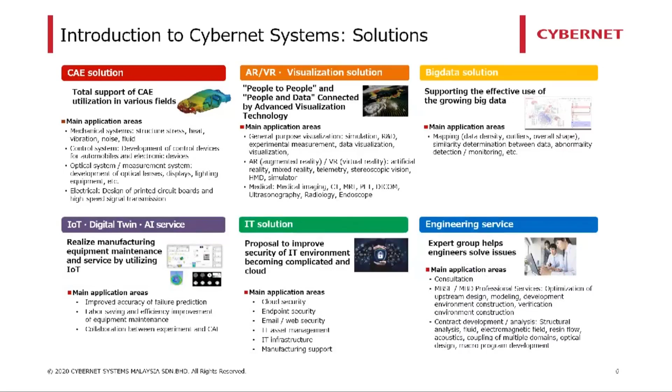As I said before, ANSYS provides multi-physics simulation for every type of need. Those simulations include mechanical solutions, thermal fluid solutions, electronic solutions, design solutions, which are mainly for designers, and some additional options which include a parallel computing module, material data selection, analysis tools, and so on.

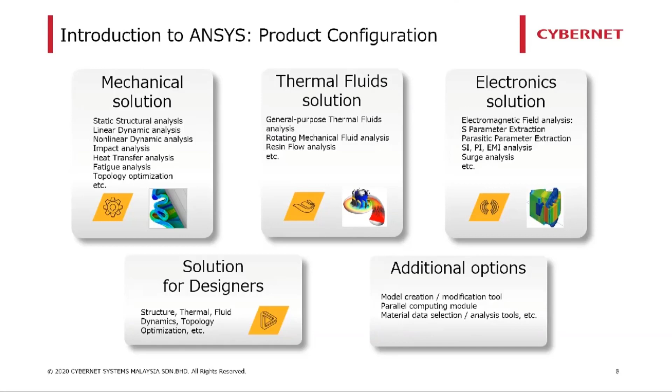So now we get into MultiScale.Sim. What is MultiScale.Sim exactly? The reason why I explained about ANSYS in the previous slide is because MultiScale.Sim is an add-in tool for the ANSYS Workbench environment. Developed by Cybernet Systems Japan, MultiScale.Sim can perform a numerical material test on composites to estimate macroscopic anisotropic material constants without having to carry out actual physical material testing. The way MultiScale.Sim performs this numerical test is by using homogenization analysis for multiscale modeling. In essence, the principle behind MultiScale.Sim is based on the method of multiple scales, used to derive averaged equations of a much larger scale from consideration of the small scale.

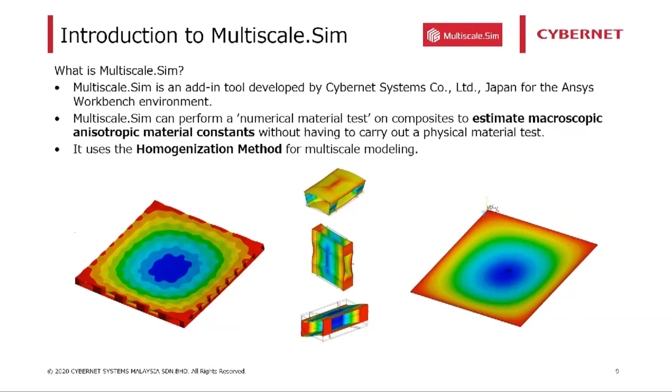Now, before we go deeper into MultiScale.Sim and its features, let's learn the motivation and background of this software first. First of all, what is a composite? Basically, a composite is made by physically combining two or more materials or components to produce a combination or blend of structural properties which is not present in any individual component. They can, for example, provide greater strength and rigidity than is found in any of the separate components while being as light as possible.

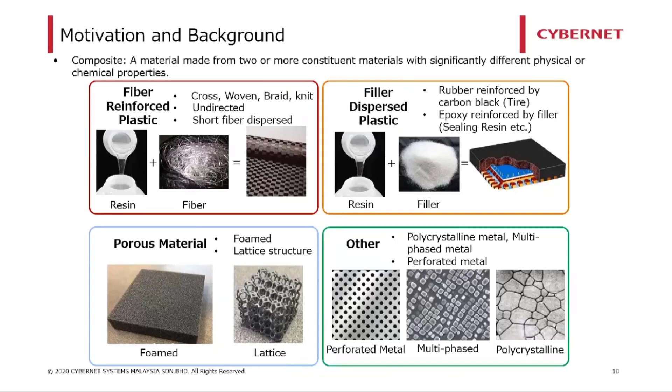So a survey conducted by NAFEMS's Composite Working Group showed that many FEA analysts often struggle the most when it comes to finding proper materials data for composite materials. Now, this matter is truly understandable as composite material is comprised of two or more materials, and the configuration of those materials may vary depending on the purpose. To find the material properties exactly like the users want can be challenging. Therefore, this is one of the motivations behind the Multiscale.Sim software, as I will explain later on. Multiscale can perform a numerical material test and accurately predict the material properties for almost any kind of composite.

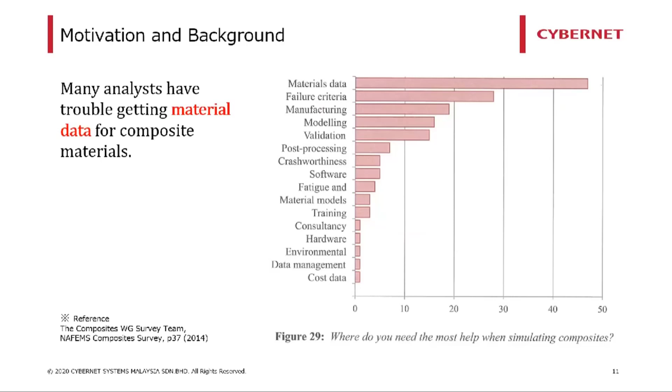Now, when it comes to finite element modeling, analysts usually stumble upon several difficulties. For example, a full structure of composite usually comprises a super thin layer of material or a very small hole relative to the whole model. Now, the scale of the microstructure to the whole model is huge, causing problems when it comes to the meshing process of the model. Plus, because the composite material possesses anisotropic material properties, fiber direction or distribution need to be taken into consideration as well, as it plays a large role in how the composite structure will behave under certain loading or boundary conditions.

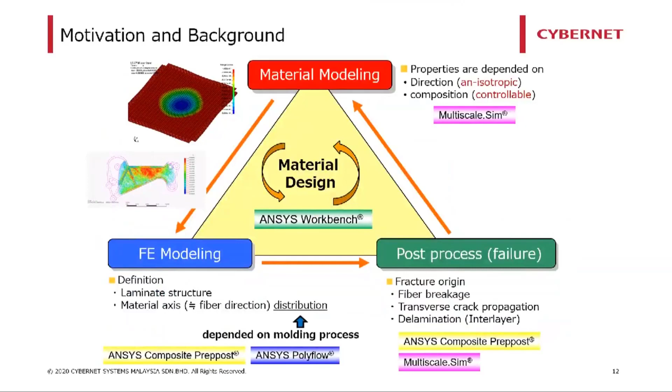And then, of course, when it comes to evaluating the result during post-processing, problems such as finding a failure model to base on for any particular composite material can be a problem as well. Again, it is because composite material behaves quite differently from a typical isotropic material. For example, predicting a fracture origin, such as a fiber breakage or delamination of a composite. Now, accurate prediction of structural characteristics is a challenging problem in FEA due to its orthotropic structural behavior. Therefore, Multiscale.Sim is aiming to tackle this type of difficulty, especially when it comes to modeling the material properties of the composites.

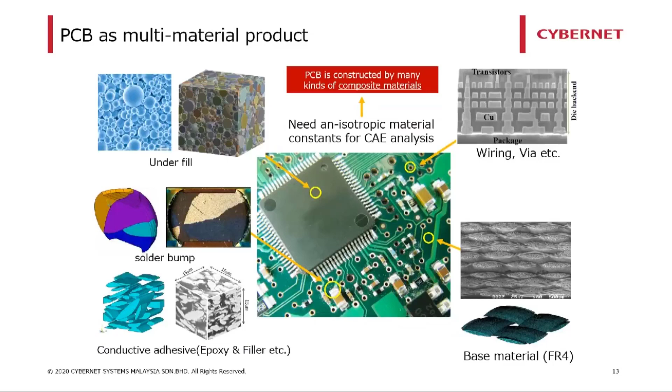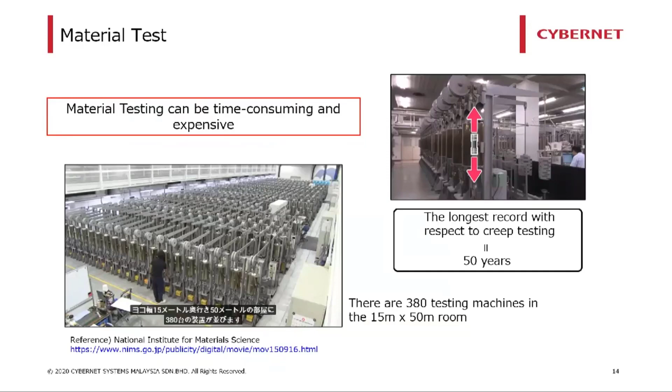So now let's dive into the features available in Multiscale.Sim. Now, what kind of function does it have to help in material design? Like I mentioned earlier, Multiscale.Sim can evaluate material property of composite material. It can be achieved by having the function of model creation, virtual material test, and also curve fitting.

Now, model creation allows the users to freely model the microstructure of the composite. The users can either model the microstructure themselves, or the users can simply use the Multiscale.Sim template available inside ANSYS DesignModeler and ANSYS SpaceClaim. Now, this template contains 17 different configurations of microstructure to choose from, including, for example, unidirectional fiber, crossweave, particle dispersion, and even honeycomb. The users can freely modify the dimension of the microstructure as well.

So now we have the main features of Multiscale.Sim. The virtual material test, also known as homogenization analysis. This is how the users can evaluate the material properties of the composite materials. It is done by performing a homogenization analysis on the microstructure that the users just define during the model creation process. Multiscale.Sim allows the users to be flexible when setting up the boundary condition as well.

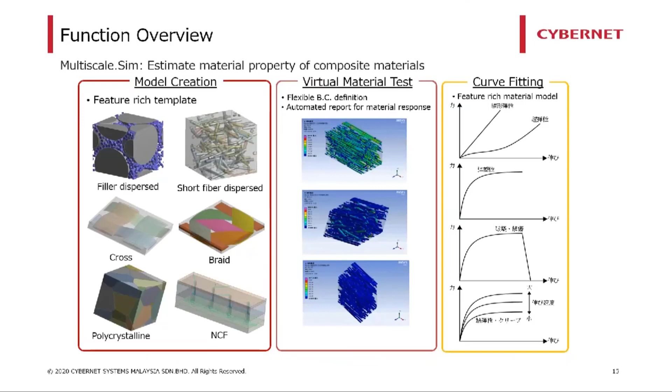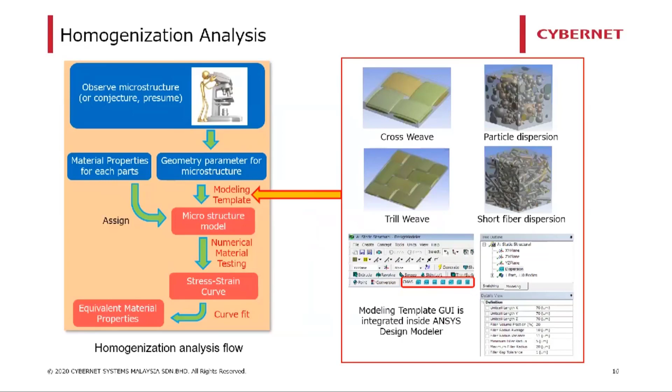As a result, the users can evaluate macroscopic material response as a stress strain curve, which is then used to evaluate the equivalent material properties via the function that I mentioned before, which is the curve fitting function. Now, the curve fitting analysis is performed in order to evaluate the material constants for any material constitutive law. All of these procedure settings can be performed in the ANSYS Mechanical GUI.

So therefore, the users are not required to learn any new operational procedures if they're already an ANSYS user. But if the users are new to ANSYS, the learning curve for ANSYS is not really that steep in my opinion. So the new users can understand how it works quite easily, especially with ANSYS Workbench. That is actually one of the major advantages of ANSYS.

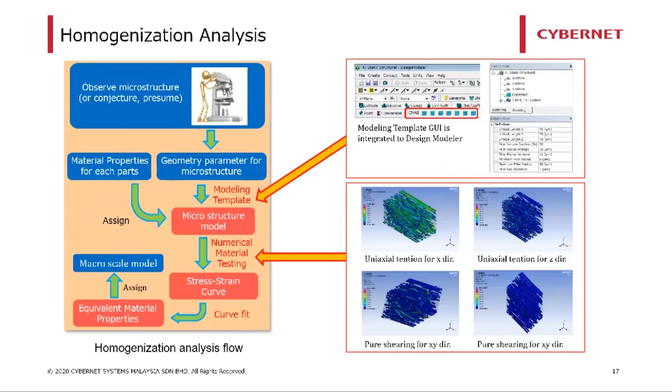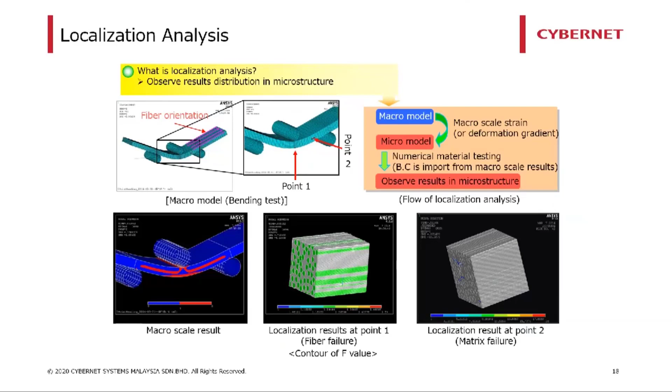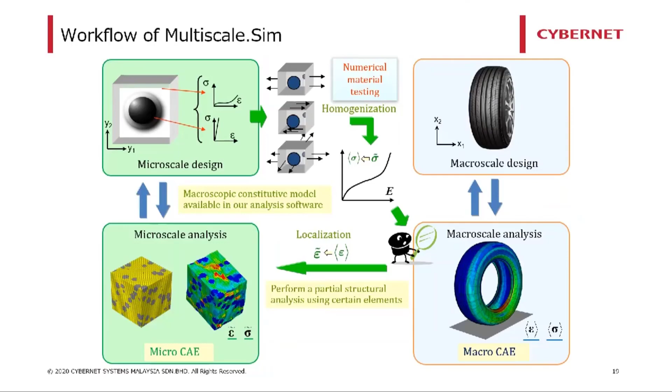So this is basically the summary of the typical workflow of Multiscale.Sim. We start with our microstructure design, followed by a material definition for each part of our composite. And then we perform the numerical material testing or homogenization analysis on the microstructure to evaluate the material properties of the composite material. Now, from here, we can either finalize our analysis with a macroscale analysis and final design, or we can continue with the localization analysis, say, for example, if the user is interested to study the microstructure behavior from our macroscale model. This final part is really up to the users.

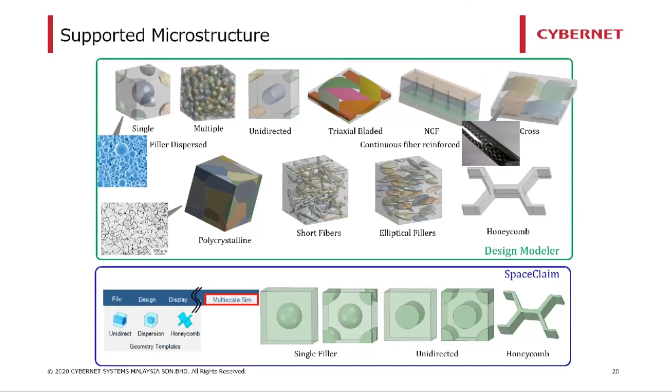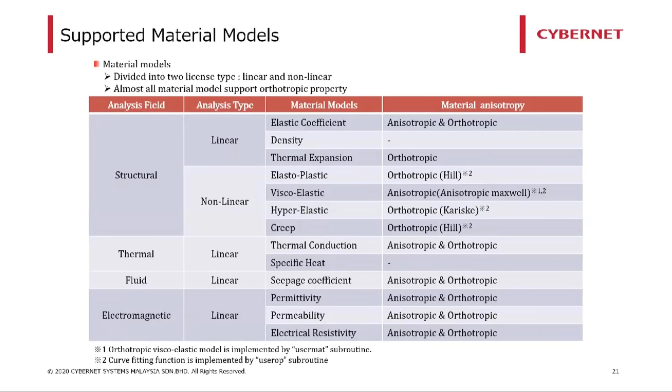So here on the slide right now are the supported material models in Multiscale.Sim. There are two types of license: the first one is a linear license and the other one is a non-linear license. The linear license allows the user to access only the linear analysis, while the non-linear license gives access to every feature of Multiscale.Sim. With structural analysis, users can have access to many different material models, as you can see on the screen. Models such as elastoplastic and also creep can be done with Multiscale.Sim. If you look at the table, almost all material models support orthotropic material properties.

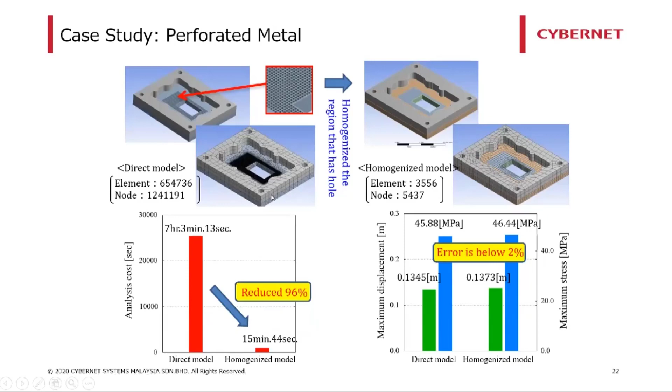For the homogenization analysis, the goal is to determine the homogenized material properties. From that material properties, we are going to use it to do our macro model analysis. Then finally, we are going to do a localization analysis using the macro model we've just analyzed, to evaluate the microstructure of the full macro model analysis.

Finally, we are going to learn a little bit about one of the examples of the nonlinear analysis you can do inside multiscale SIM. For elastoplastic homogenization analysis, we are going to evaluate the stress strain characteristic of the material, and also identify the material constant by performing curve fitting.

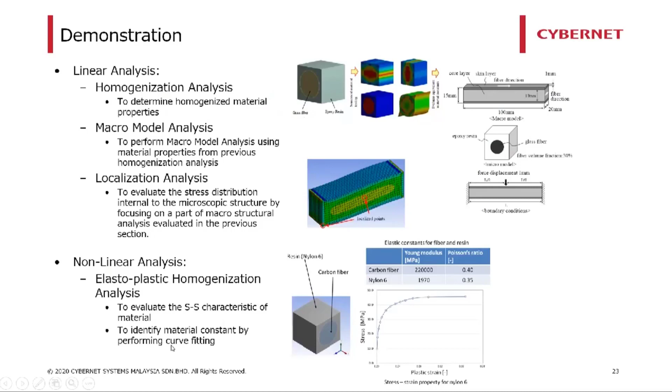So first, I'm going to show you how to launch the multiscale SIM. To launch it, you go to your start menu, and you can see the multiscale SIM launcher. Now you can select which version of multiscale SIM you want to use. Currently the latest one, multiscale launcher version 2.1, is available with ANSYS 2020 R1. Therefore, that is the one I'm going to pick.

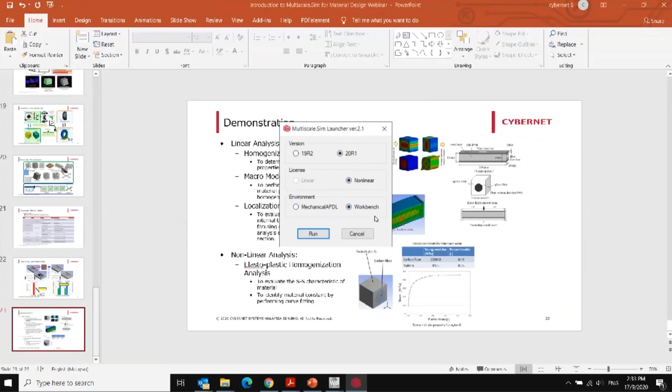And then for the license, I'm going with the non-linear license. For the environment, I'm just going to focus on the workbench for today. And then I simply click run, and it will launch ANSYS with the version you've just chosen.

So after launching multiscale, we are presented with what we call the ANSYS workbench. On the workbench we have this white region, called the project schematic. On the left-hand side is the analysis system, where you can choose whatever type of analysis you want to do. For this example, I'm going to use a static structural analysis throughout the demonstration.

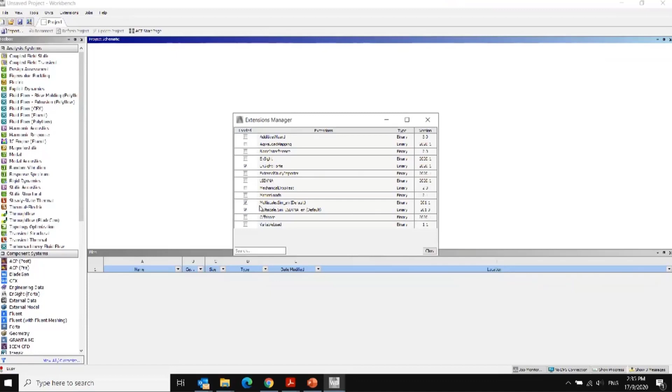So to launch multiscale sim, first we have to go to the extension, and then go to manage extensions. You need to activate multiscale sim here on the extension manager. As you can see, I've already done it before. After you check these two boxes, you can simply close it, and then multiscale is ready to use in your ANSYS environment.

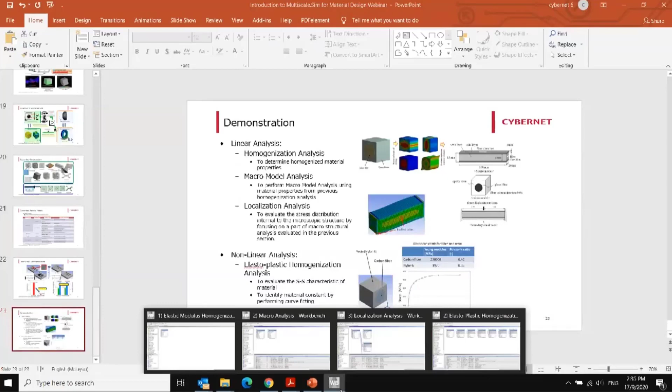And now for the first demonstration is the linear analysis, or the homogenization analysis of our microstructure. I have actually done the example beforehand, because the calculation time can take quite some time to finish, and therefore I've done it in advance. But I'm going to walk you through the step-by-step procedure on how you want to do the homogenization analysis and other types of analysis with multiscale sim.

So the first one is the homogenization analysis. We are first going to drag this static structural analysis into the white region project schematic. And then next step, like I mentioned before, the first step is to define the material for each of our components of our composites. So to do so, we go to the engineering data right here.

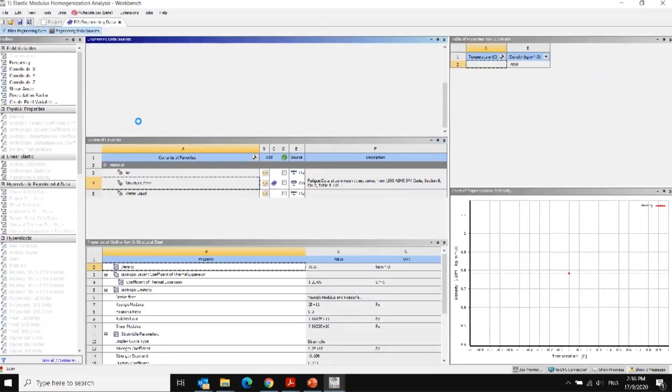Then we go to the engineering data sources, and we want to scroll down until we find the multiscale folder. We click it, and then we have different types of material that we can choose from. For this particular example, a linear analysis of the homogenization analysis of a linear material, I'm just going to select the epoxy resin elastic, and then also the glass fiber as well.

So our composite will be comprised of these two materials. Then I simply click close. Next, what I'm going to do is actually model the microstructure. So how am I going to do that? I'm going to right click on the geometry, and then go to the design modeler. Right now launching the design modeler. This is where you actually create the microstructure that you want to analyze.

Like I mentioned before, you can either make it yourself, or say, for example, you already have CAD data for a microstructure that you want to analyze. You can simply import it into the ANSYS environment.

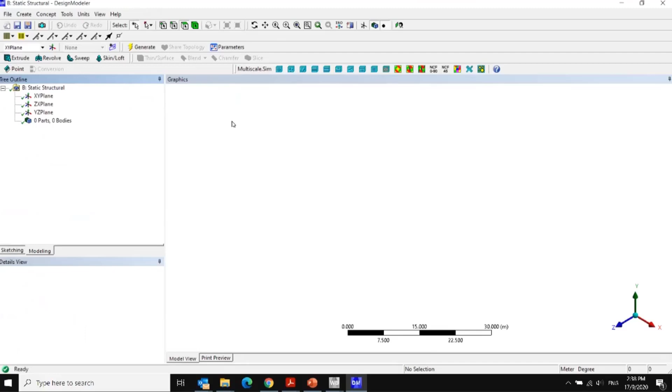Right now, I'm just going to create a simple microstructure. First, I'm going to change the units into millimeter. And then for this particular example, I'm going to use the unidirectional material microstructure.

After I click this, you see here it's already included in our tree. Now under the details view on the definition, I can change the volume fraction of my fiber compared to the whole total volume of the microstructure. In this case, I'm just going to use 50% volume fraction of the fiber, respective to the 100% volume fraction of the filament. Now you can either define or not the fiber diameter. In this case, I'm not going to define it, because it is okay as long as you define this part of our model right here.

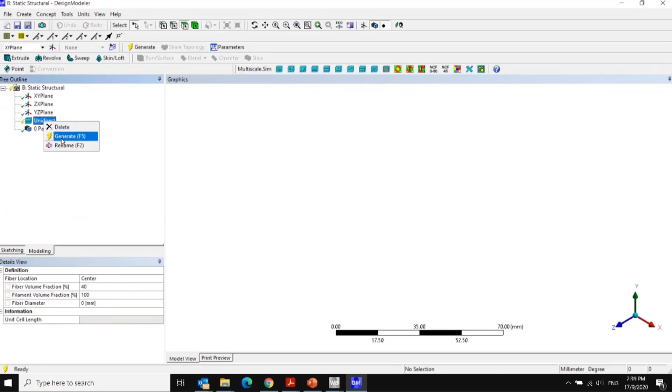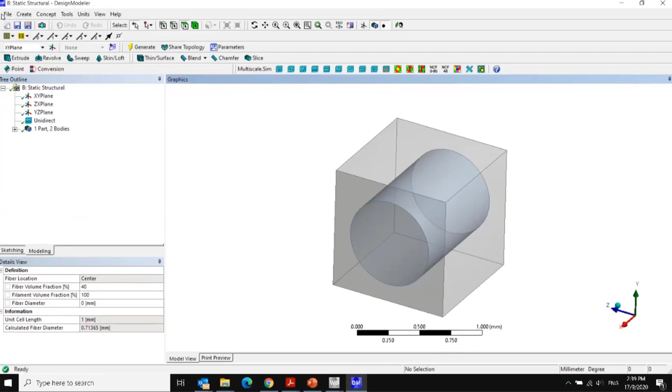Then I simply right click on the unidirectional and then click generate. Now as you can see, our microstructure has already been generated. We have the filament volume fraction here. Then on the inside, we have our fiber, which is 40% compared to the whole microstructure. After I've defined my microstructure, I'm just going to close the design modeler and then go into the modeling or pre-processing of ANSYS.

Right now we are starting the mechanical, ANSYS mechanical, as you can see on the bottom left hand side right here.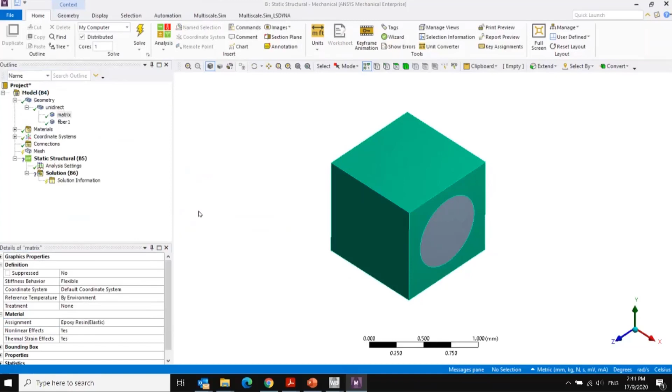So now our microstructure has successfully been imported into the ANSYS mechanical environment. First, what I'm going to do is go to the geometry and then expand this unidirectional object and then define the material that I want to use. For example, the outside here is the matrix, which I am going to use the resin for. And then for the fiber, I'm going to use the material glass fiber as the material.

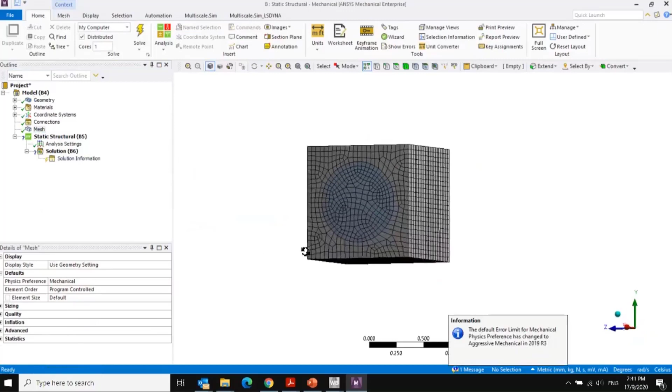And then next, I'm just simply going to mesh my microstructure. So here we have a fairly fine mesh for our microstructure.

And then for the next part, how am I going to start with the homogenization analysis is by clicking on the static structural right here. And then I click on the Multiscale Sim tab on top. And here, as you can see, is basically the option of multiscale function inside ANSYS Mechanical.

These three here is for linear analysis. And then these two here is basically for the nonlinear analysis. Now, because this is homogenization analysis for the linear material, I'm going to click on linear and then click on homogenization setting. What it does is basically give us the option to select the homogenization type that we want to use.

Now, the user can either select this one, the elasticity density thermal expansion, which means if you select this, the output you can have is the elasticity, density, and thermal expansion as the material properties. Or you can also select this one, the integrated cross-section stiffness as the output.

Or you can also select seepage flow coefficient as the output. So in this case, I'm going to select the first option.

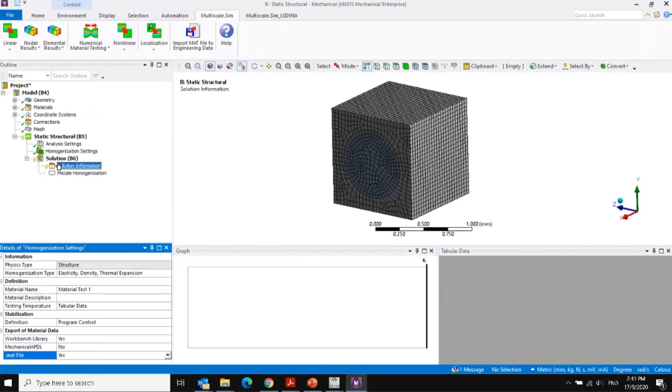And then you just right click here on the static structural, and then you just click solve to initiate the homogenization analysis. Now, because I've done this before, I'm just going to show the results straight away.

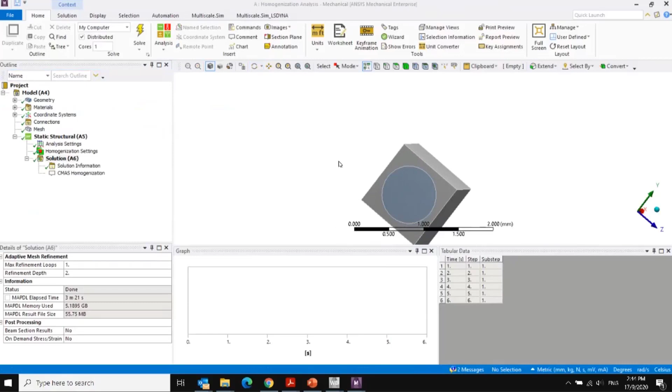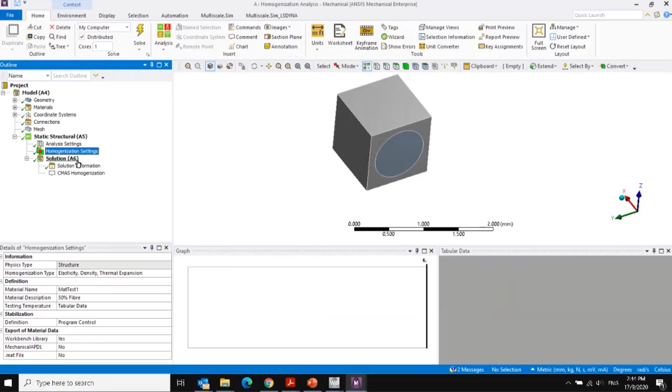Okay, so this is basically the same example that has already been calculated. So we've done with the homogenization analysis. Here I name the material as mat test 1, and then I put a material description of 50% fiber, because in this case I'm using a 50% volume fraction for the fiber. And then what I'm going to do next is click here on the CMAS homogenization.

When you do that, here as you can see, our material properties have been generated for this particular microstructure. Here we have the Young's modulus for each direction. Because this is a composite, it is an anisotropic material, and therefore you have a different value of material properties depending on the direction.

Now in this case, you can see the x direction having the value of 3.8 times 10 to the power of 10, comparing to the y and z direction, which is only just 1.13 times 10 to the power of 10. So this is basically an orthotropic material, because two directions have the same value, while only one direction has a different value.

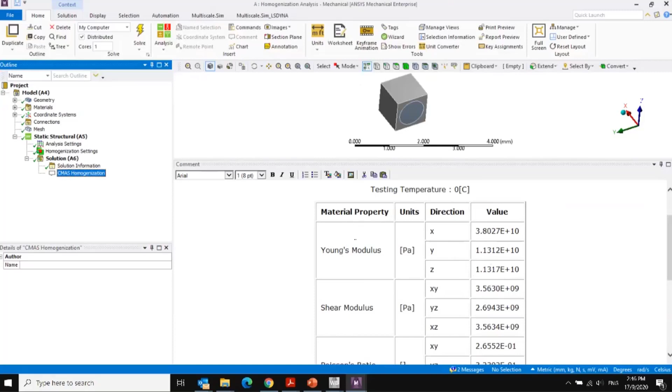So here, as you can see under the material properties, we have the Young's modulus, shear modulus, and also the Poisson ratio. And then we also have the elastic matrix of our material that has been generated as well.

Then we are going to visualize each of the material tests that this microstructure has gone through. So what I'm going to do next, I'm going to the multiscale.sim tab again, and then on the elemental result, I'm going to select stress.

Here, as you can see, it will display a stress, which is stress from the test of uniaxial tension in the x direction. And then what I'm going to do is input another 5 of those results.

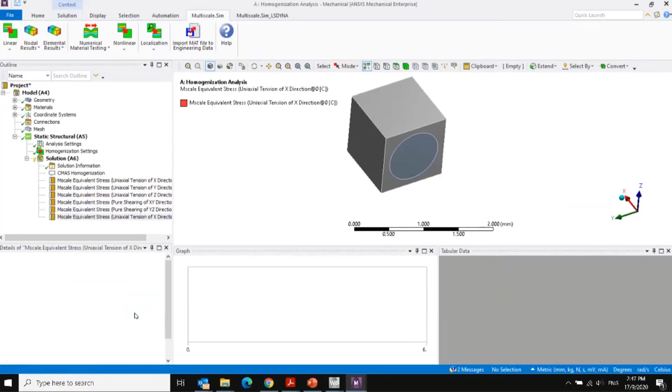Then I'm going to change each of these into a different direction. This one I'm going to change into the Z direction. Then for the next 3, I'm going to change it into a pure shear test for each of the planes. Then I'm just going to right click here and click on evaluate the results, because this is post-processing and therefore it will not take too much time.

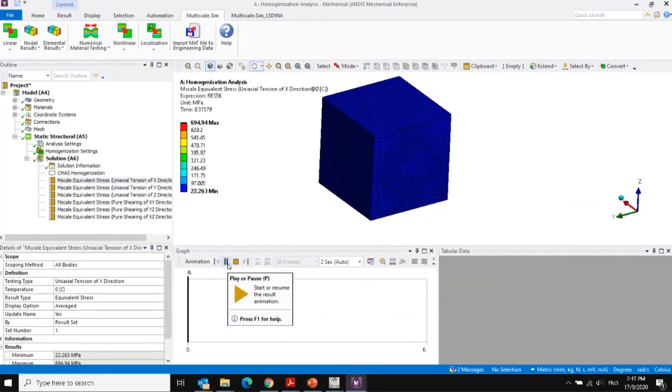Now we can view each of the stress tests that has been going on our microstructure right here. Now you can even animate the deformation or stress of our microstructure, because this is one of the features of ANSYS. It can animate whatever happened on your model and therefore help the users to understand the model or the result even more. So there is another advantage of using ANSYS.

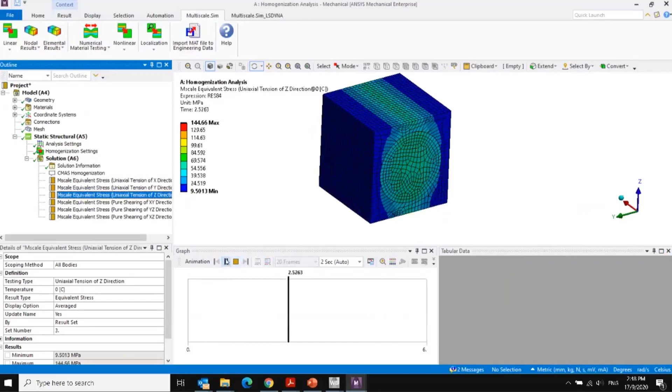Then of course we have the y direction, the x, the z direction as well, and of course the shear test. Now from these tests is where these material properties and information are extracted from, and therefore this is how it gets this material property.

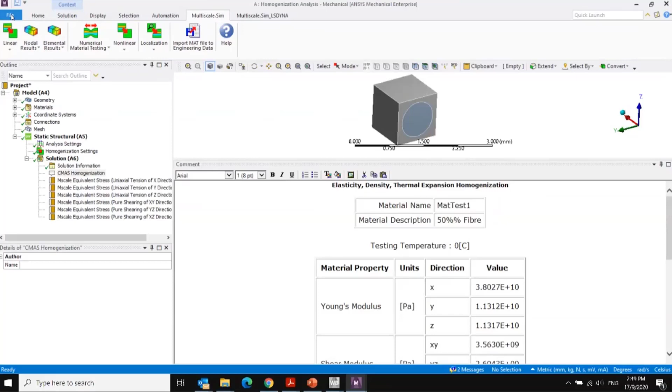So this is basically what it means by homogenization analysis. From a microstructure, you run several tests on it, and then it gives out an output of material properties for the particular microstructure. And then the material properties can be used for a much larger scale model, or a macro model.

So next we go to the macro analysis. Now as you can see right here, we've already done the homogenization analysis. And then if you see here on the engineering data, I've already included the material test, mat test 1, which is the name of the material that we've just made and what we just got from the homogenization analysis just now.

Now, using that material test data, we are going to apply it to our geometry. Now, this macro model geometry has already been done in advance.

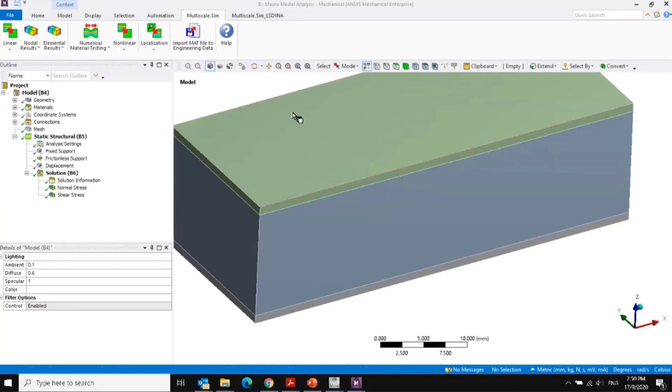So here is our model. As you can see, we have a sandwich composite, so to speak. We have this top and bottom side of our model, and then the middle side, we call it core. Now, if you can see right here, the way I want to model it is for the fiber to run in the longitudinal direction for the skin, top and bottom. And then for the core, I want the fiber to run in the width direction of the model. So how am I going to do that inside our macro model?

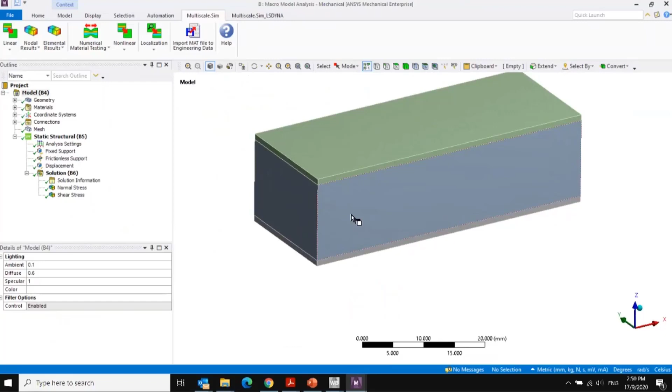Because here, as you can see, there's no physical or actual fiber included in our model, since it's already been homogenized, and therefore we are just going to use the material properties. Now, to do so, I'm just going to change the coordinate for the core right here, for the x direction to be facing the y direction of the global coordinates. And therefore, because this is the principal axis for the fiber, it will run according to the direction of the x axis.

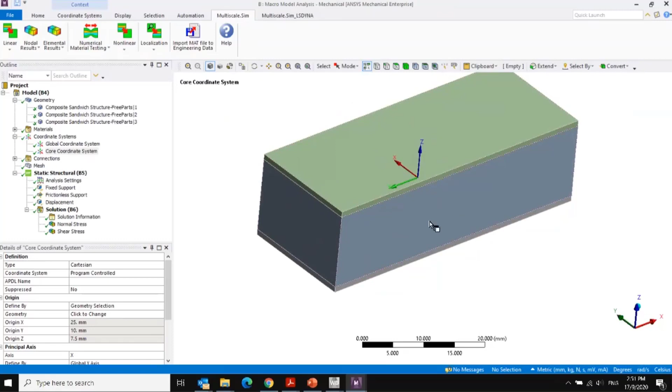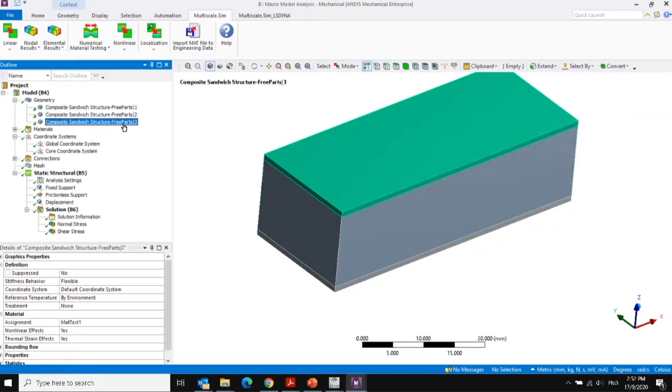Then again, I'm defining these parts using the material model that I've just made, which is the mat test one. As you can see right here on the core as well, and from the top side as well. Next, I'm just going to simply mesh our model.

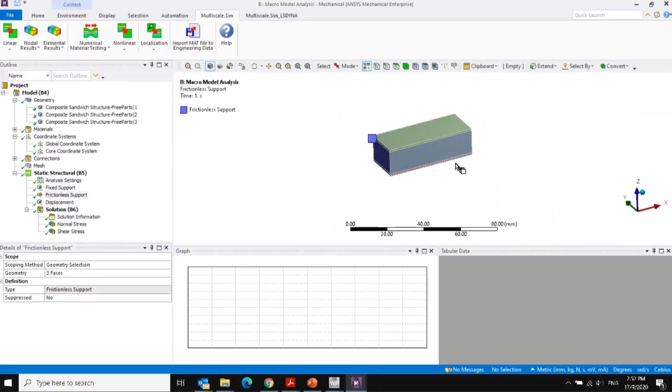For this, I'm actually trying to simulate a bending test for this particular model. This is basically a half model, which is symmetric on this plane. So you can imagine there's another similar block on this side right here. By doing this, it can basically cut the simulation cost in half. And I also put a displacement in the middle to simulate a bending test. And then we have this as a result. So this result basically came from the material that we've just made from the homogenization analysis.

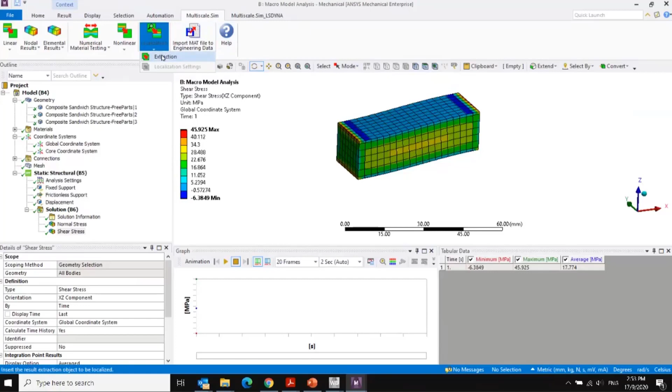So next, what I'm going to do is walk you through the localization analysis. So basically, to do a localization analysis you go to this Multiscale tab. Right here, we have the localization tab. Click on it, and then we simply click on extraction. So, for example, I want to study this microstructure on this region right here. I'm just simply going to select this, then click apply. And then I'm just going to right click and then click on evaluate all the results.

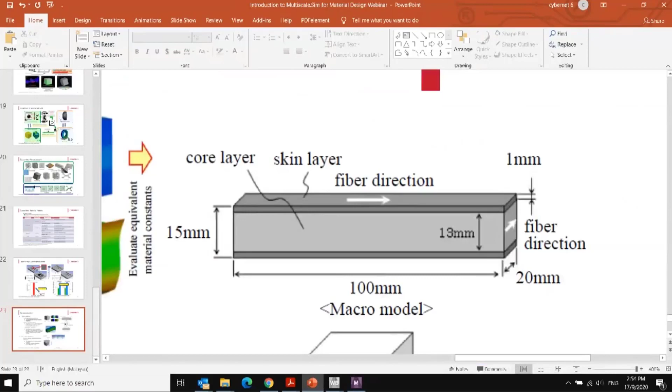And as you can see, I've already extracted this particular region to do the localization analysis on. The strain value on that particular region has already been extracted. But what I'm going to do next is actually see the microstructure behavior of our model. So I'm going to drag static structural analysis and then drop it into the model cell on the A cell right here. Then simply double click on it.

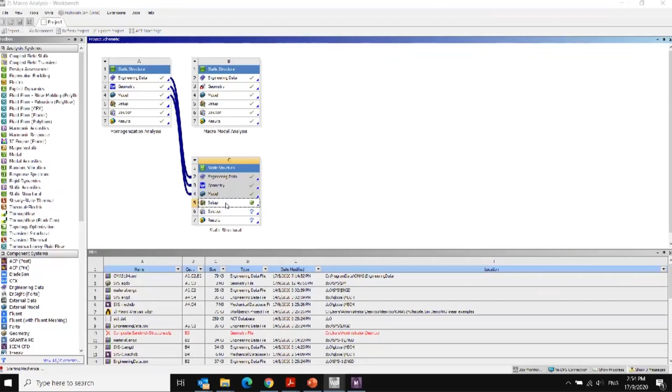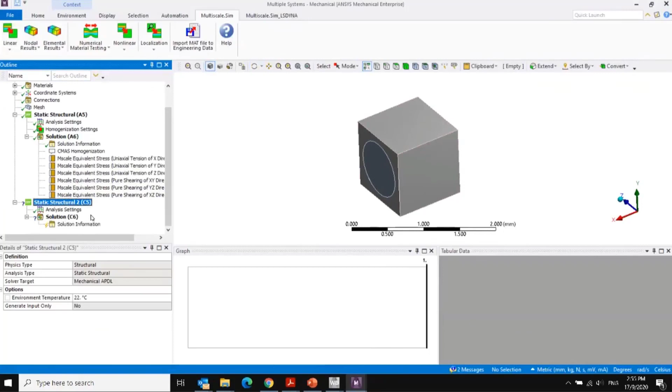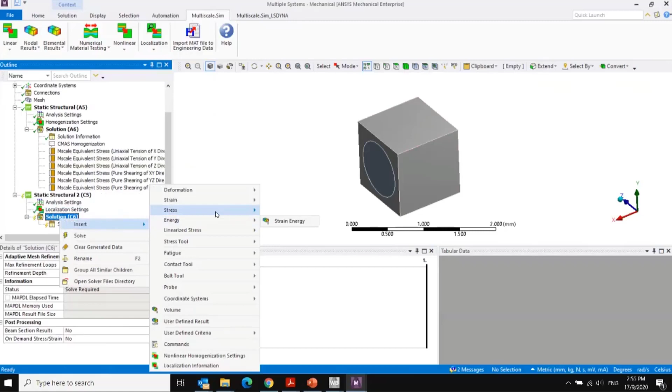Okay, so as you can see right here, we already get our microstructure here. And then from this static structural analysis, I'm going to go to the localization tab again, and then click on localization setting. Now here, as you can see, we already have the extracted microstructure that we've done before. We also already have the strain value for that particular microstructure. And then on the solution, I'm just going to simply insert an equivalent stress as the result. Then I'm just going to simply right click, then solve this.

It can take quite some time depending on how fast your computer is. After we've done this calculation, it will show the equivalent stress on that particular microstructure from the one that we selected on the previous analysis from our macro model.

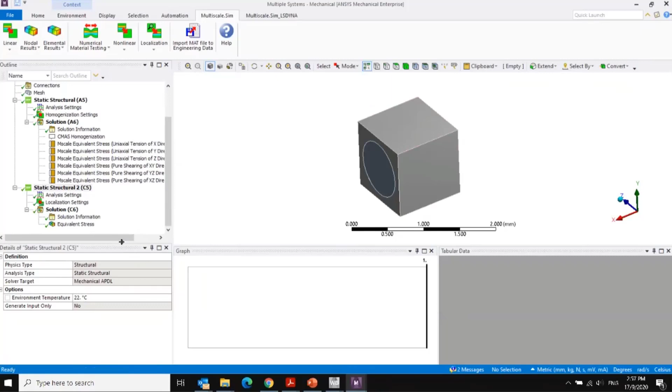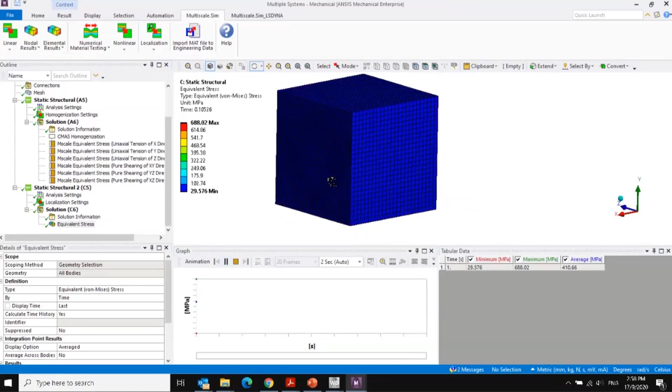Okay, so now the calculation is done, we're going to view the equivalent stress on that particular region. So as you can see, it's put under tensile stress because it's placed right at the middle where the bending occurs, and it's actually at the tension region of the whole macro model, and therefore you see the microstructure as well is currently having a tensile stress applied to it. So that's basically what is meant by localization analysis. From a macro model, you extract one microstructure to view what is going on at the microscopic level.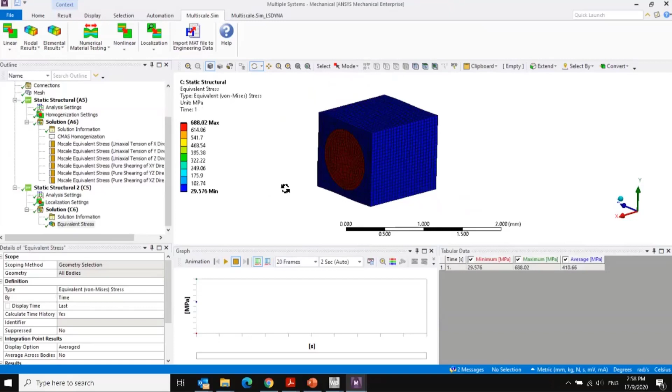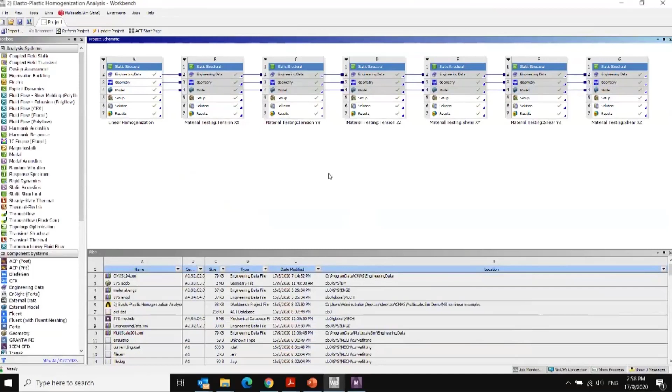So finally, we are going to take a quick look at the nonlinear analysis featuring Multiscale.Sim. Now, in this case, it is an elastoplastic homogenization analysis. As you all may know, elastoplastic is a nonlinear material, and therefore we need a nonlinear analysis for this part. The basic procedure is almost the same as when you are doing the linear analysis, but the setup is a bit different. So I'm going to show you how to do it.

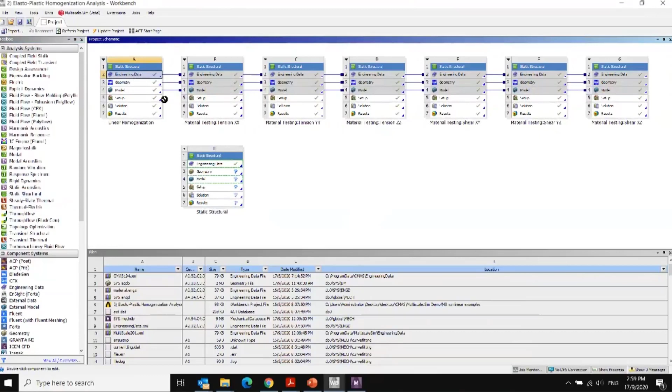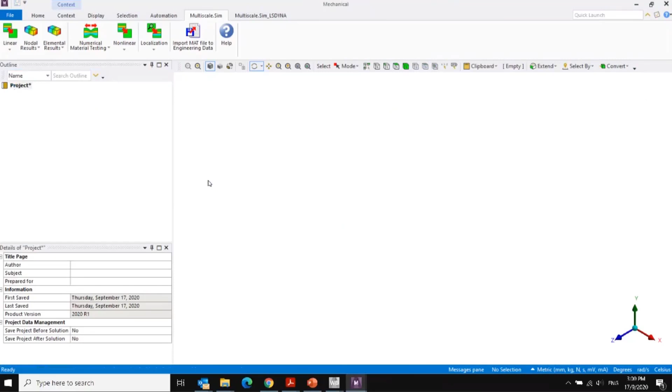Again, I'm going to drag a static structural analysis inside the cell. And then I'm just going to connect these two, basically using the same engineering data as I used before. Then I'm going to open the model as well. So again, our model has already successfully been imported into ANSYS Mechanical.

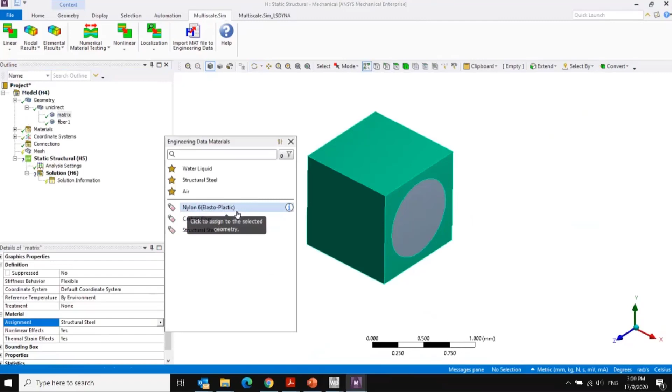Now let's see the material that we're using. So for this outside right here, instead of using nylon elastic, I'm going to use the nylon elastoplastic for this case. Then for the fiber, I'm just simply going to use the carbon fiber as the material. So this is basically a combination of a carbon fiber and an elastoplastic material. Then again, just simply mesh our model right here.

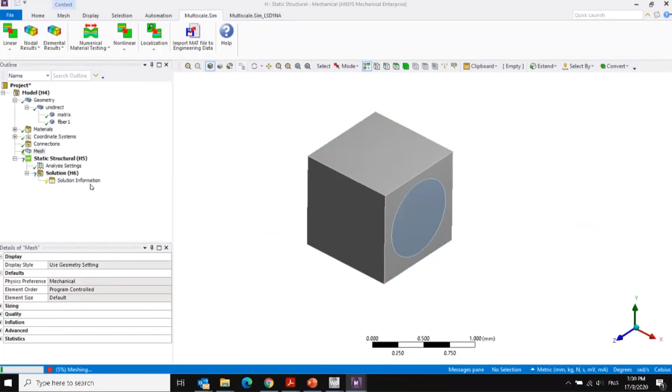So here we have already meshed. And then here, instead of going to the linear homogenization analysis setting, we are going to this part right here, which is numerical material testing, which basically means a homogenization analysis for nonlinear material. Then I'm going to select this parameter identify set. It's basically to run a test according to the material model to be homogenized.

And then after you click that, you are presented with this setting window right here. Now here you can select what kind of material that you are using. In this case, I'm using elastoplastic. Therefore, I'm going to select elastoplasticity for the model that I'm going to use. You can also select viscoelasticity, creep, and also hyperelasticity. Then I'm just simply going to click this create system.

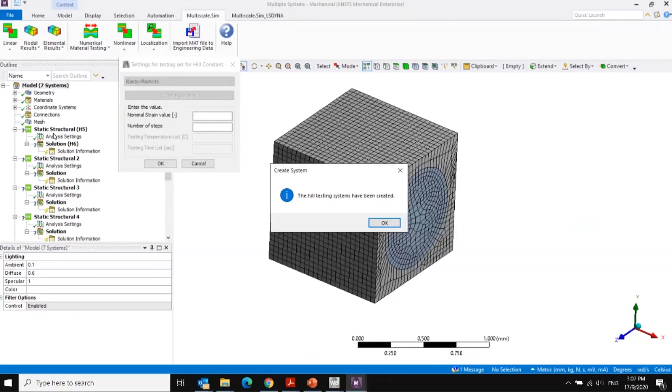After you click that, as you can see, it automatically generates these 6 more analysis windows right here. This is because it is required to do a material testing, and therefore each of the tests requires its own analysis window. For the nominal strain value, I'm just simply going to input 0.1. The number of steps, I'm simply going to input 25. And I click OK. It will automatically set up the pre-processing of your model.

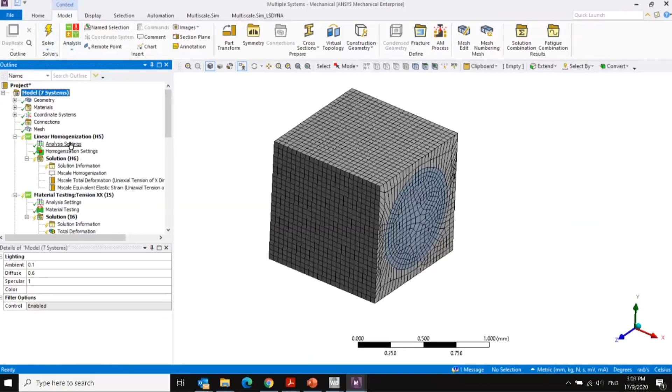So now it has already been set, you just simply click here on the model and then you click solve to start the homogenization analysis for your nonlinear material. Now this one will take quite some time because it is a nonlinear analysis and therefore it takes a little bit more time.

Now before you run the analysis, you need to quickly change the analysis setting for each of the analyses. And then you see right here on the large deflection, we need to turn this on for each of the analyses, turn on, so on and so forth. And after you've done that, you simply click solve, and then it will run the homogenization analysis as you wish.

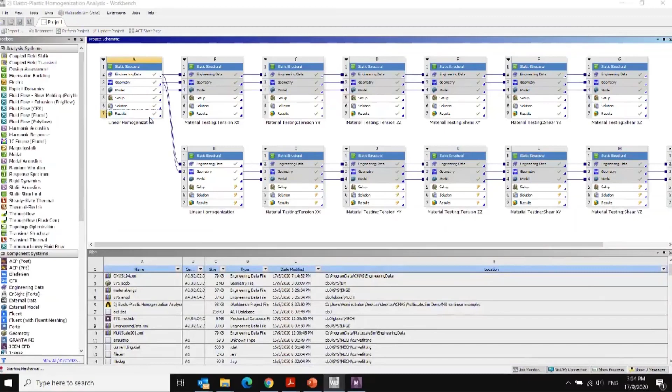Now let's review what is the output from the homogenization analysis for the nonlinear material, which in this case is the elastoplastic material. So this is what I've done before. As you can see, the icon is a green check mark, which simply means that it's already been solved. Then here you can see a nonlinear homogenization analysis setting. So I'm just going to delete this first.

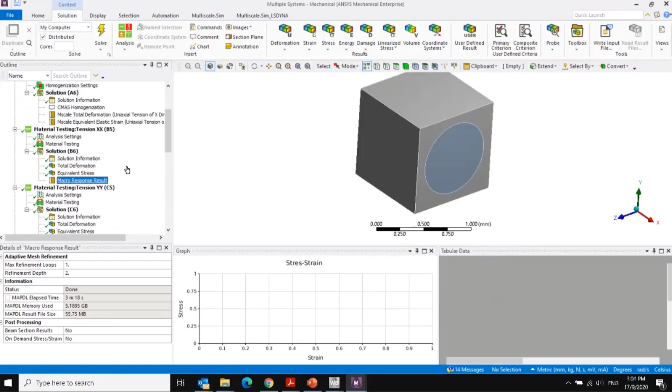Now after you've done that, you can see there's a macro response result. Now this is where the stress strain curve is generated or extracted from each of the material tests, depending on what kind of test is already done. For example, this macro response result is the material testing for the uniaxial tensile test in the x direction. Now in the x direction, the stress predominantly comes from the fiber, which is an elastic material. And therefore the stress strain curve right here, as you can see, is a linear curve.

But when you take a look at the tension in the y direction, the stress strain graph here is actually a curve, because in the y direction, the stress predominantly comes from the filament right here, which is our nonlinear material. Same goes with the z direction as well.

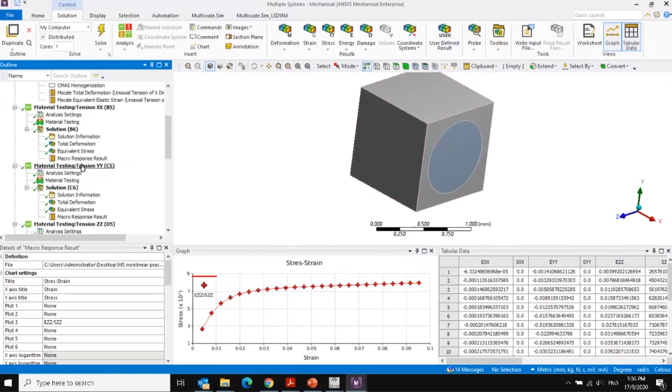And then next, after you get this kind of result, we are going to do a curve fitting using the curve fitting function inside Multiscale.Sim. Now how we're going to do that, we go to the solution right here. And then we are simply going to right click, insert nonlinear homogenization setting. And then here is where you need to specify the plastic strain value at which you try to fit the Hill stress. Now in this case, I'm just going to say, for example, 0.03.

And then here in the engineering data section right here is where you want to export all of this data into usable material data. Maybe the next time you want to use this, you can simply find it in the engineering data, like I mentioned before. So like before, you simply put a name, and then put some material description, and then export, you click apply. And then you simply right click here and then click generate. Now it's already done the curve fitting.

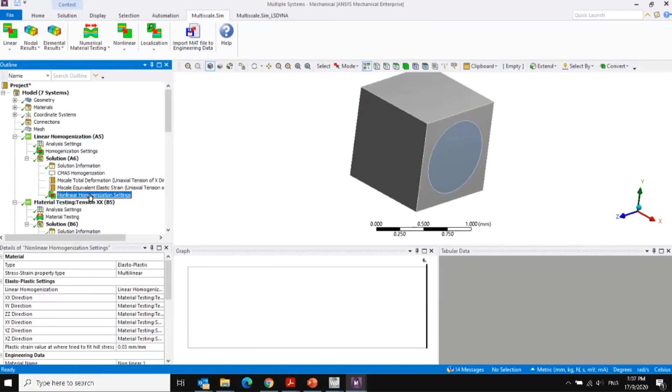Now we want to view it by clicking on nonlinear and then select the curve fitting result. Now here, as you can see, you can ignore the tensile test in the x direction because it is actually linear. And as you can see, this is basically what the graph looks like when you apply the curve fitting function.

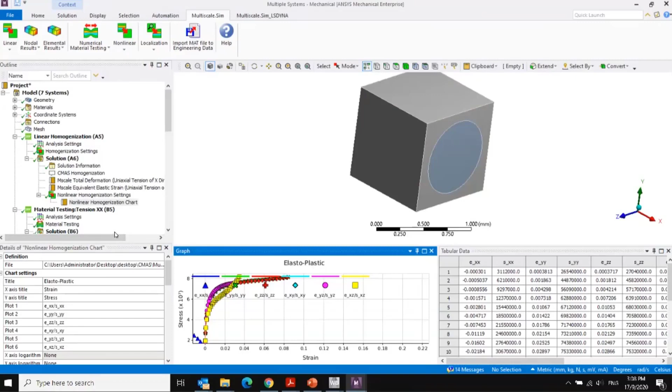Now after you've done this, this is where the material properties are extracted from. After you've done the curve fitting on the homogenization analysis results, we can get the material properties for our nonlinear material right here.